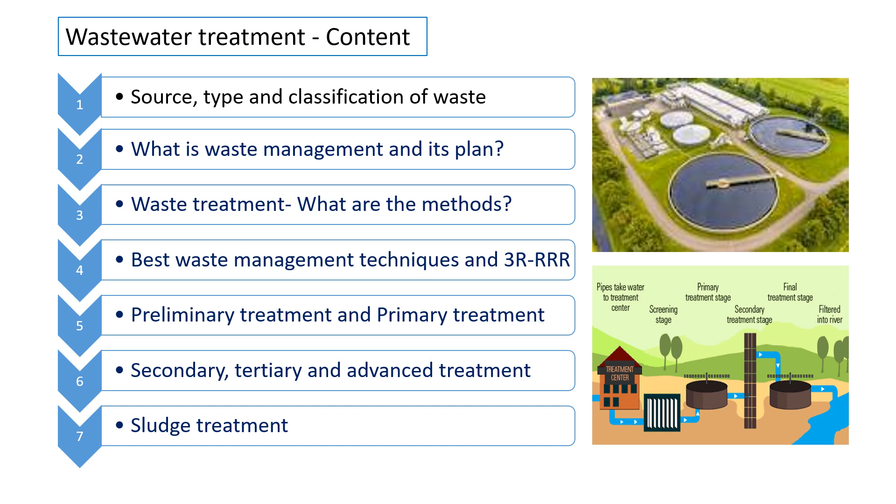Contents are: source, type and classification of waste; what is waste management and its plan; waste treatment and its methods; and waste management techniques, including preliminary, primary, secondary, tertiary, advanced treatment, and sludge treatment.

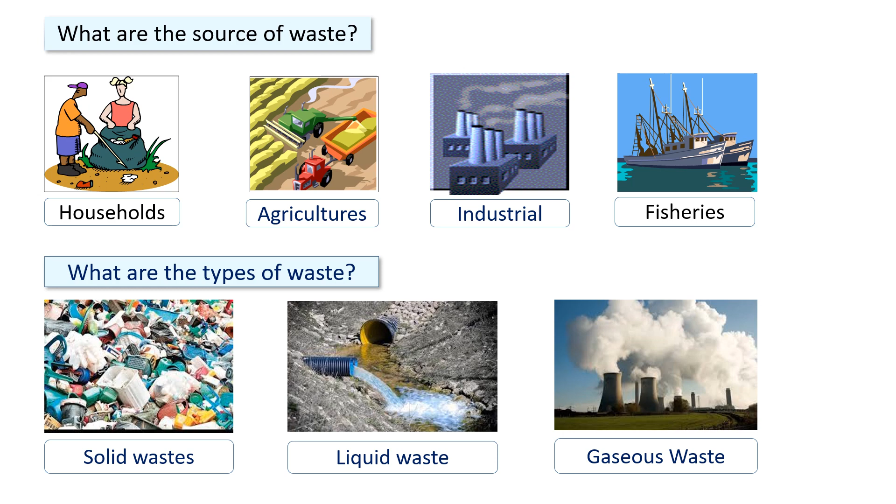Sources of waste are households, agriculture, industrial, and fisheries. Types of waste are solid, liquid, and gaseous. Classification according to properties: biodegradable, non-biodegradable. According to effects on human health and environment: hazardous, non-hazardous. According to origin and type: municipal solid waste, biomedical waste, industrial waste, agricultural waste, fishery waste, radioactive waste, and e-waste.

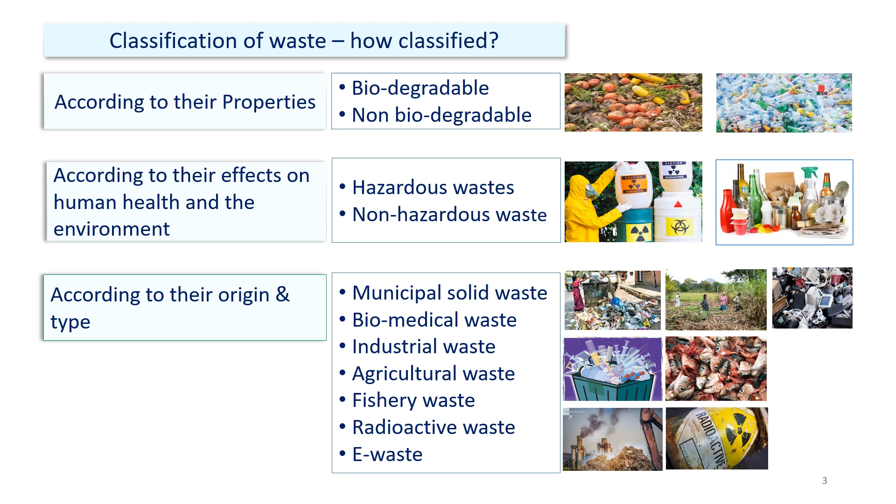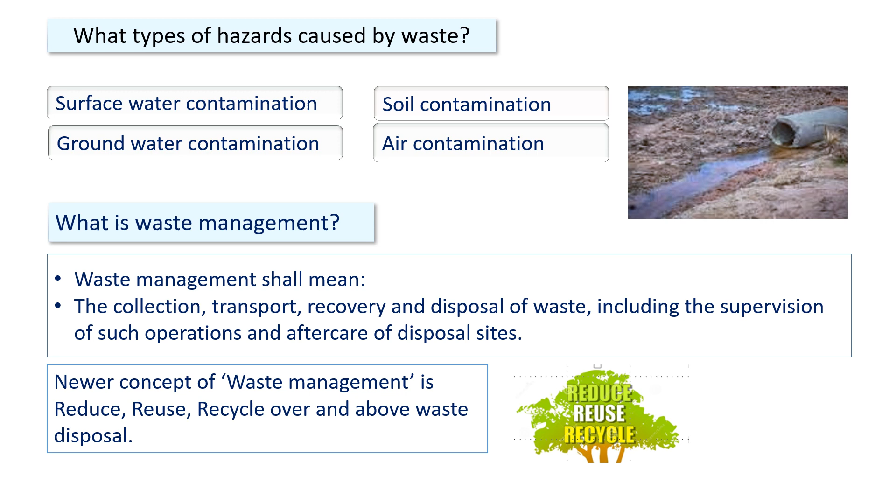The newer concept of waste management is reduce, reuse, recycle, over and above waste disposal.

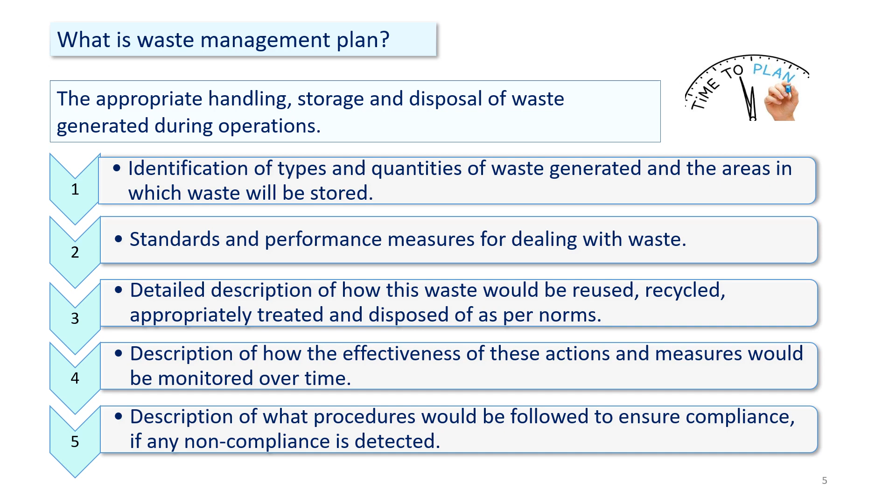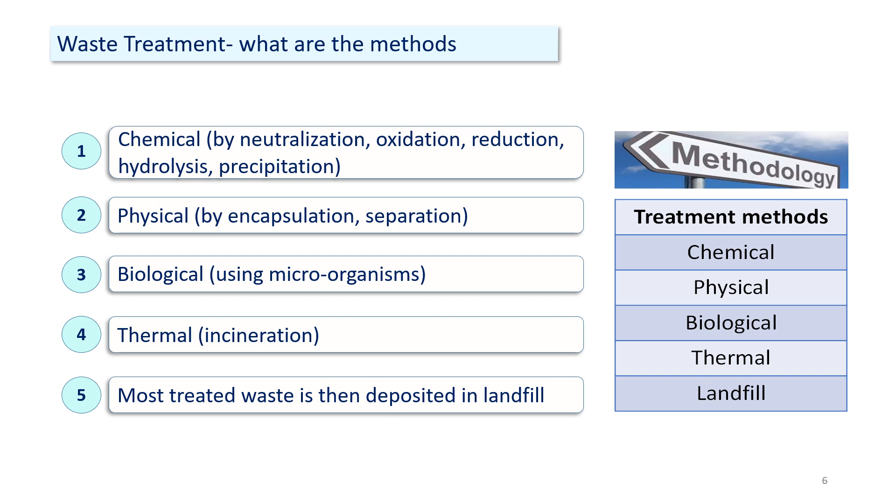Most treated waste is then deposited in a landfill. The best available technology is for waste minimization, which can be subdivided into process modification, equipment modification, material substitution, reuse, recovery, and recycle.

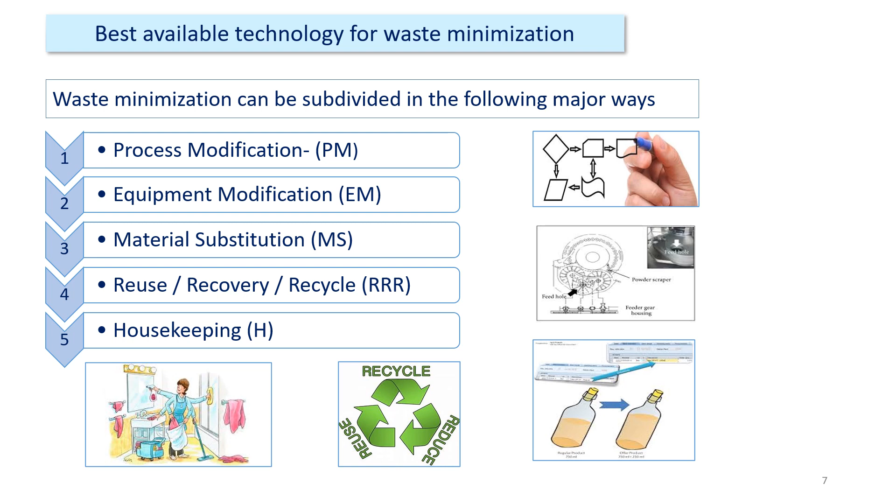Best waste management technique follows the order: source reduction first, then reuse, then recycle, then resource recovery, then incineration, then landfilling. That means prevent, minimize, reuse, recycle, energy recovery, and last disposal.

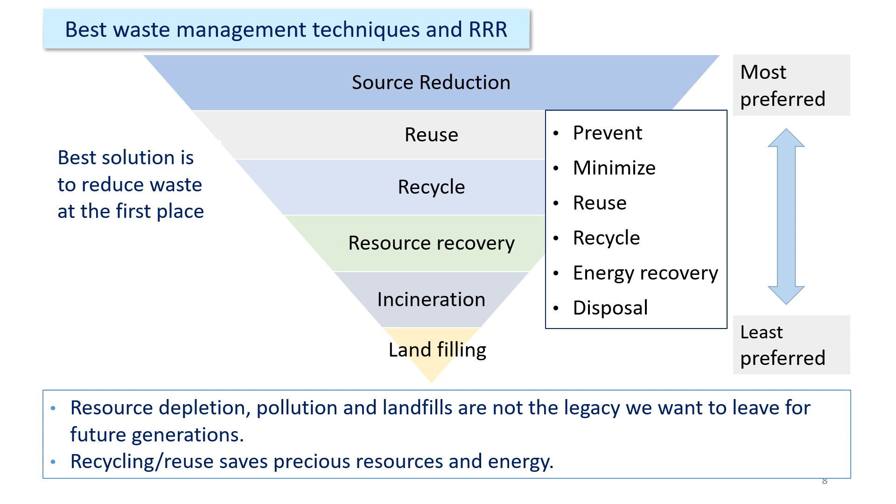The best solution is to reduce waste in the first place. So preventing or source reduction is most preferred and landfilling is least preferred. Resource depletion, pollution, and landfills are not the legacy we want to leave for future generations. Recycling and reuse save precious resources and energy.

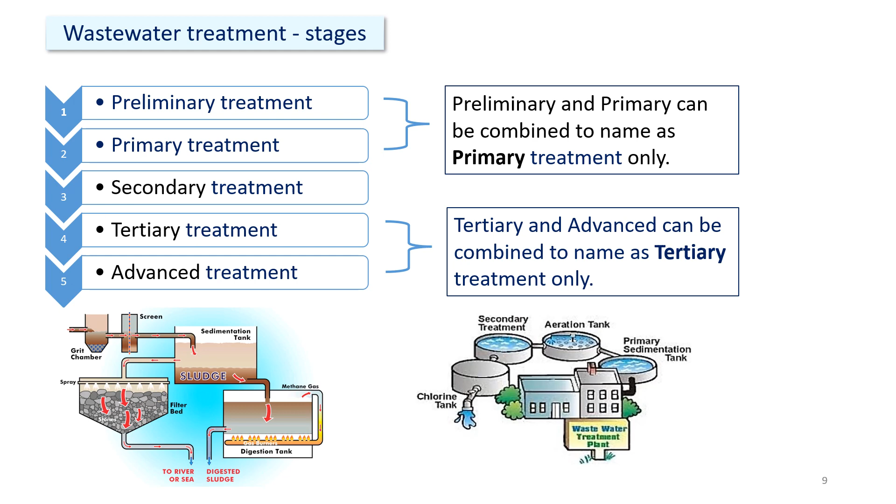Stages of wastewater treatment are preliminary, primary, secondary, tertiary, and advanced treatment. Preliminary and primary treatment can be combined and named primary treatment only. Tertiary and advanced treatment can be combined and named tertiary treatment only.

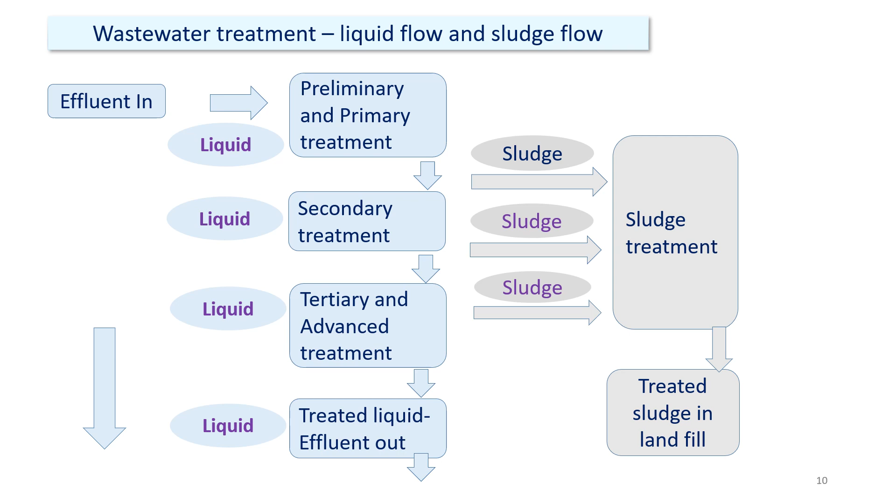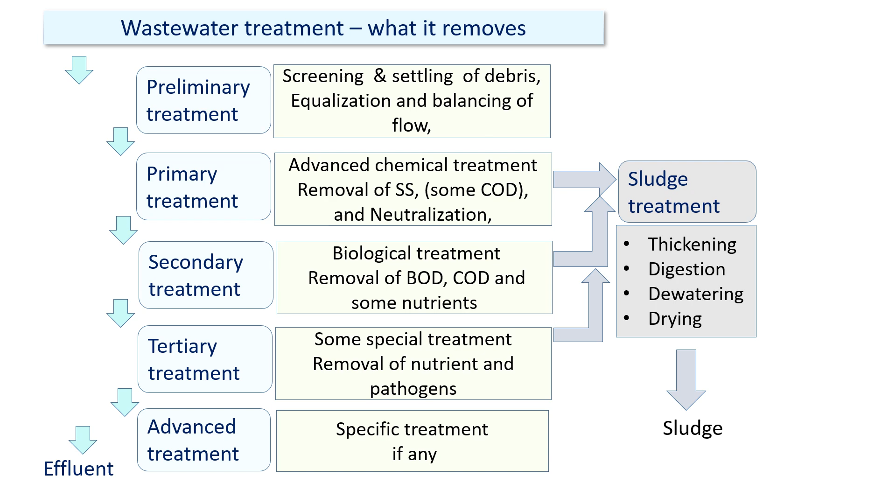Tertiary treatment: special treatment for removal of nutrients and pathogens. Advanced treatment: specific treatment if any. Sludge treatment: by thickening, digestion, dewatering, and drying.

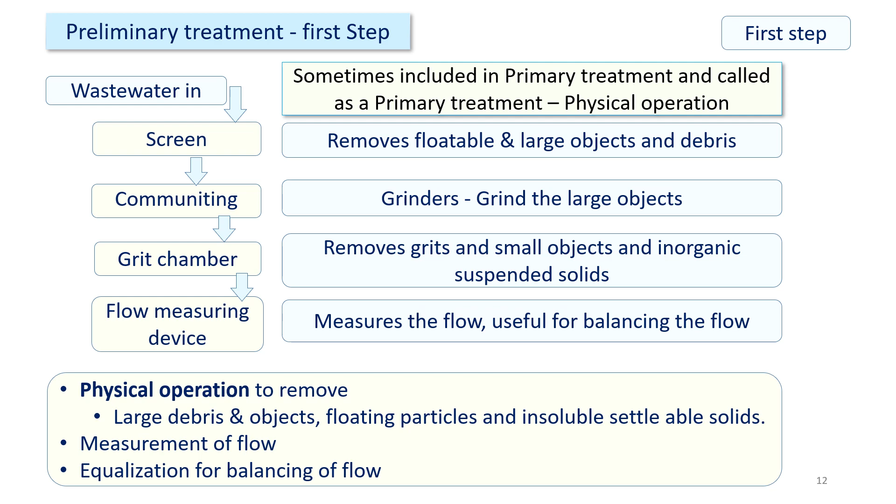The grit chamber removes grit, small objects, and inorganic suspended solids. A flow measuring device measures the flow, useful for balancing the flow. This physical operation removes large debris and objects, floating particles and insoluble settleable solids, along with measurement of flow and equalization for balancing of flow.

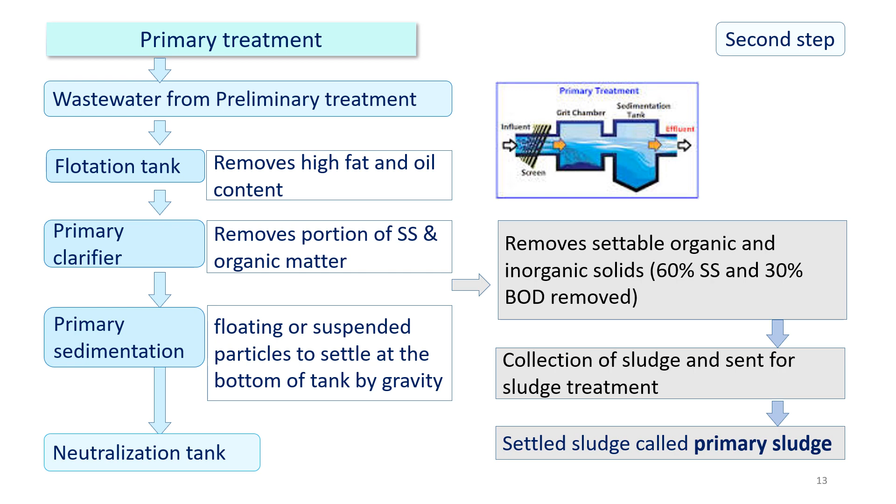In solids, settleable organic and inorganic solids are removed, with 60% SS and 30% BOD removed. Sludge and sand are collected for sludge treatment. The settled sludge is called primary sludge.

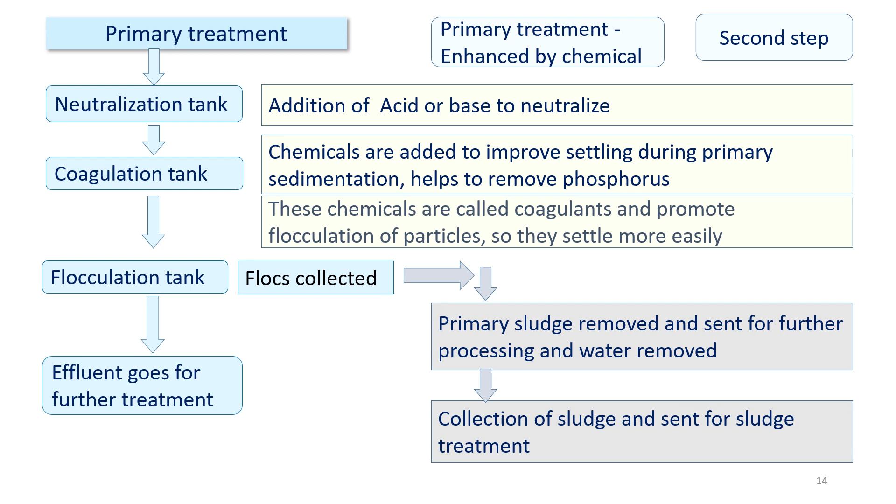In the flocculation tank, flocs are collected, then effluent goes for further treatment. Primary sludge is removed along with sand for further processing, and water is removed. Sludge and sand are collected for sludge treatment.

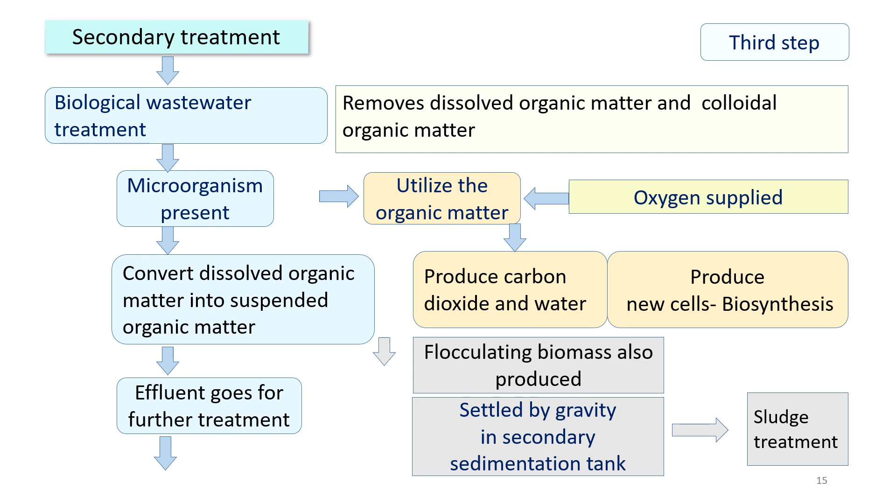Effluent goes for further treatment. Flocculating biomass also settles by gravity in the secondary sedimentation tank and goes for sludge treatment.

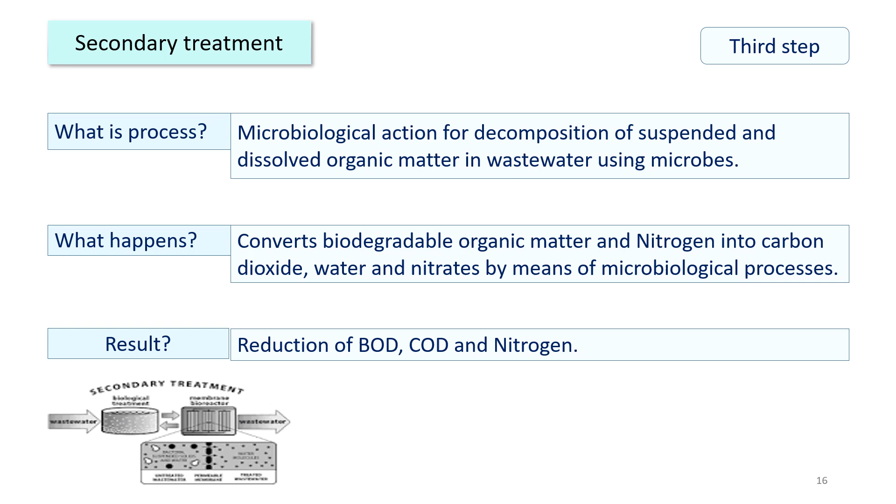Secondary treatment process: microbiological action for decomposition of suspended and dissolved organic matter in wastewater using microbes. It converts biodegradable organic matter and nitrogen into carbon dioxide, water and nitrates by means of biological processes. The result is reduction of BOD, COD, and nitrogen.

Tertiary treatment, the fourth step: effluent comes from secondary treatment. Disinfection by chlorine gas removes pathogens. This is followed by removal, through physical and chemical treatment processes, of total suspended and dissolved solids, nitrogen and phosphorus, heavy metals and toxins, residual nutrients and hazardous components, and specific organic and inorganic constituents.

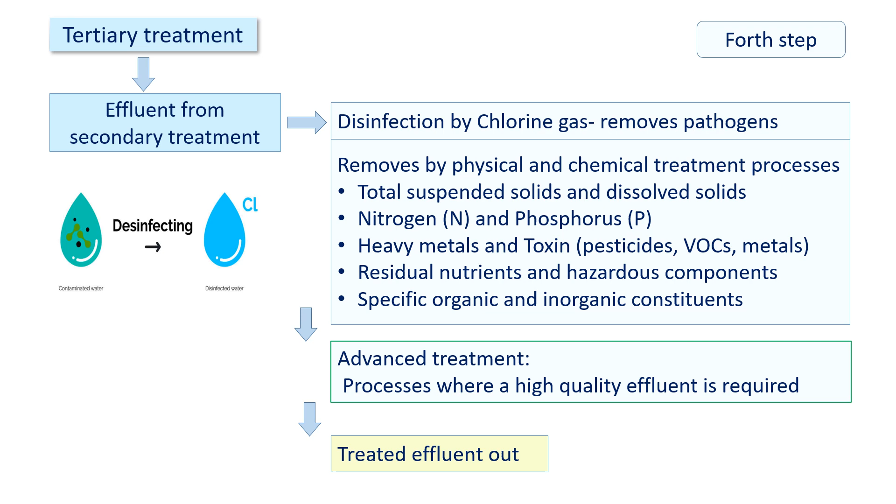Advanced treatment processes are used where high quality effluent is required. Finally, the treated effluent goes out.

Wastewater treatment summary: Preliminary treatment involves screening and settling of debris, physical operations for removal of large objects, equalization for balancing of flow, and measurement of flow. Primary treatment involves physical operations to remove free oil and suspended solids, sedimentation of debris, pH neutralization, reduction of heavy metal, and chemical treatment to improve settling ability through coagulation and flocculation.

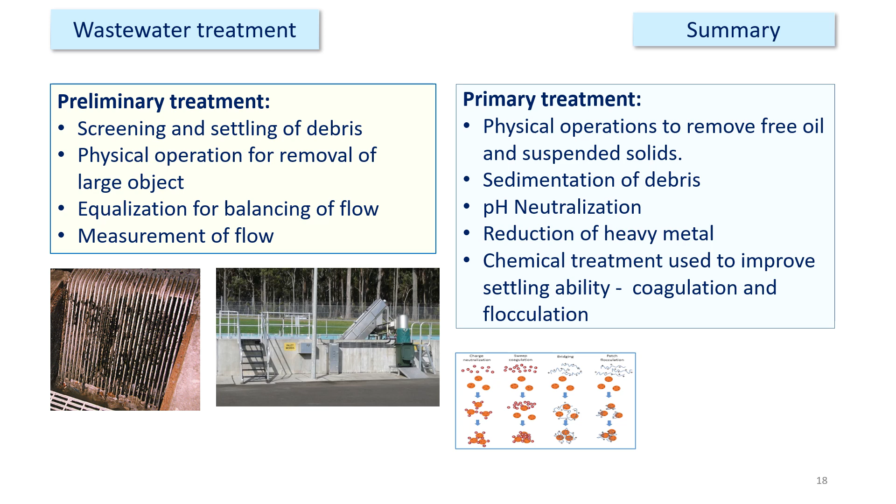Secondary treatment removes dissolved contaminants through chemical or biological treatment, removes organic matter via biological degradation by microorganisms (aerobic and anaerobic), and removes nutrients such as nitrogen and phosphorus.

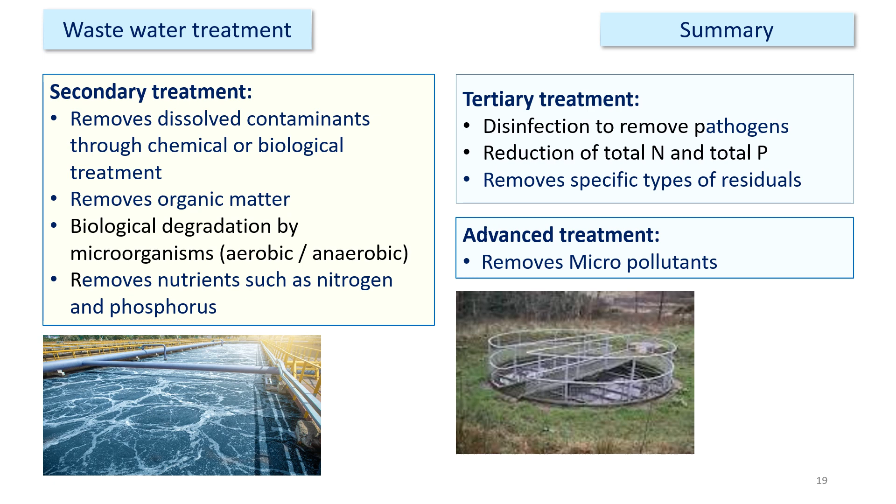Tertiary treatment involves disinfection to remove pathogens, reduction of total nitrogen and total phosphorus, and removal of specific types of residuals. Advanced treatment removes micropollutants. Sludge treatment is a major process.